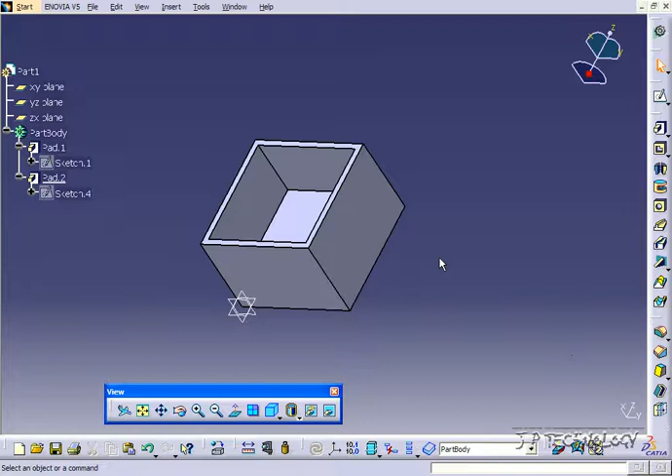Now, to use the Stiffener, all you need is one profile, or one line that's opened, and from that you're able to make a stiffener. So what we're going to be doing is creating a line along here and extruding it across. So to start off, let's click this face here and we'll click sketch.

Now when you're drawing these lines in here, there's two different ways to do it. You can go from line to line, touching the points there, or you can do it inside the box without touching any of the lines. So this is two different ways of making a stiffener. The first one we're going to make is just draw lines that are inside this box, not touching the edges.

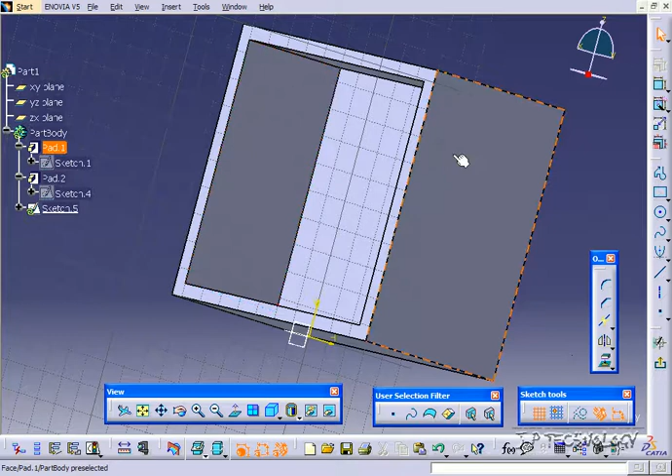So let's just rotate it around a bit and just draw a little line just like that in there. And if you look on the side, you can see that it's inside the box. Now go back up, click Stiffener, and we're going to be using the from side mode. You're going to be able to use the from top mode when you click on the points to points.

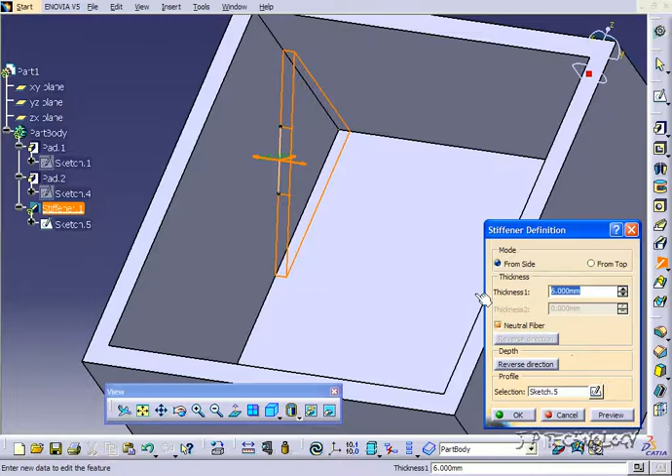So if we zoom in, what this is going to let us do is we're able to, with a thickness, slowly bring that sketch out. Now you'll notice that our sketch is only in here, but what this is going to do with the stiffener is it automatically extends it out to the edges and kind of cleans everything up for you. So let's bring this out 20, and we'll click OK. And the stiffener comes out 20 millimeters.

Now let's double click on the sketch. And let's just move this around. So let's drag this guy more over to here, and let's see what our result is. And you can see that now our stiffener has moved over also. Now let's delete this stiffener, and we're going to do it the other way that I was talking about.

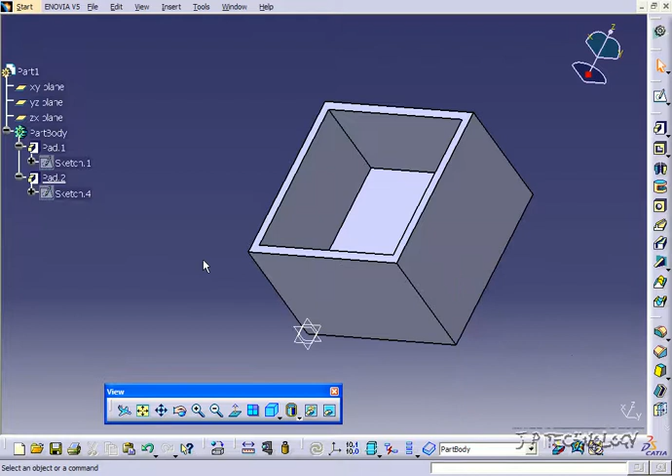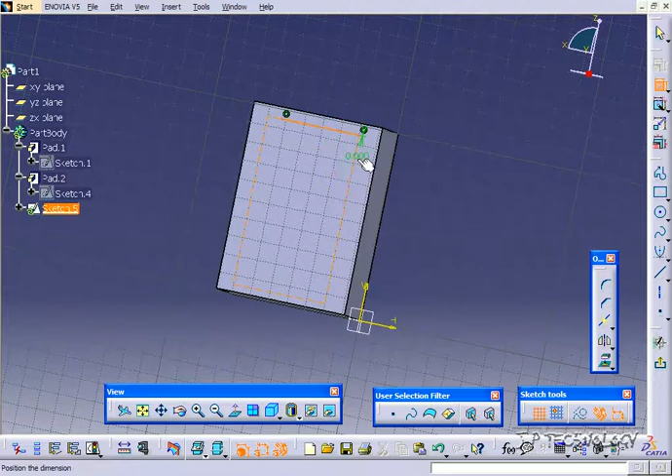So let's click this face, click sketch. Now click this face, and we'll project the edges, turn them into construction lines, and now we'll sketch from point to point. So we'll do one from this point along here to a point along there. Now let's put a little angle in there so we can play with it after. So we have an angle about 30 degrees. So let's put in 30.

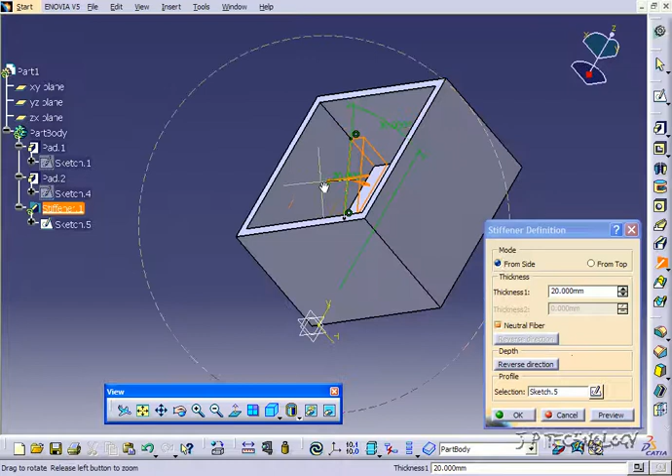And let's go back up. And let's click the stiffener. And from this one, you can use the from side or you can use from top. So right now on the from side, we're making exactly the same one that we had before. From top, we're going to make one that's going to have a hollow opening in it. So let's click OK.

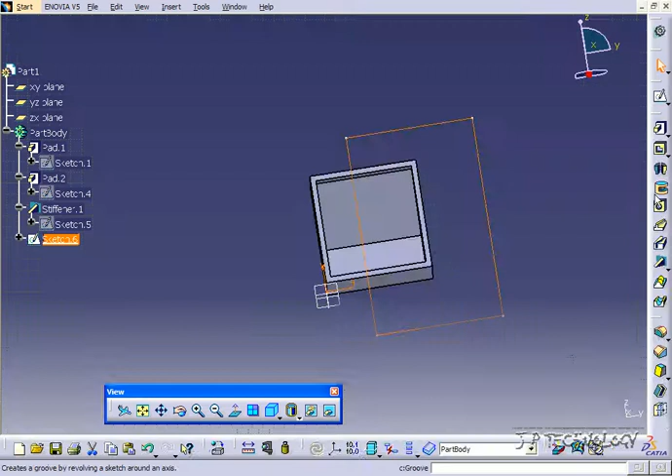And let's click on this surface here, and we'll sketch out quickly a rectangle and just cut this little bit out just so you can see the gap in there. So if you can see in the back there, you have a gap, and that's what using the from top compared to the side is there. And let's go back.

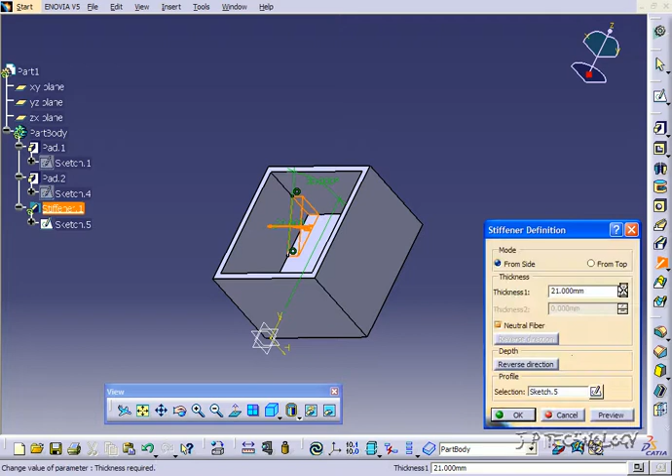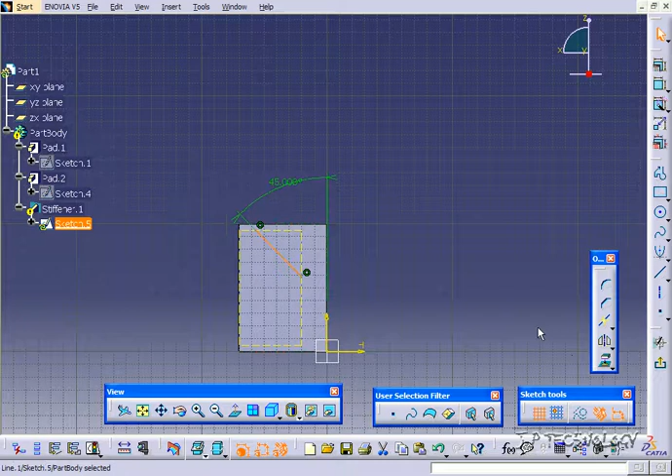Now let's make the stiffener again using this point to point, and we're going to use the from side. So this is just like the other one. We're just going to extend it out 21, click OK, and we'll edit the sketch, change the angle to about 60. And because it was outside, it's not going to work, so let's go back into it, put it to 45, and just bring it in. And it should work this time. And it does. So you're able to play around with the stiffener like that.

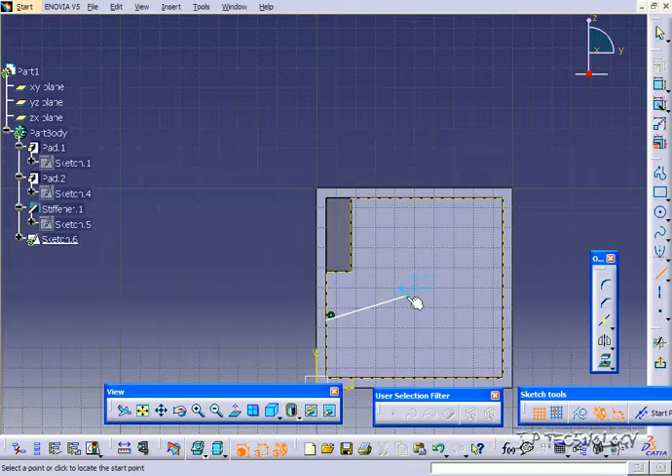Now let's do one that's on the top. So let's click this top surface here, click sketch. Now we'll click this face here, project it out, and turn it into construction lines, and let's just draw a little jagged line across. And we'll go back up, and we're going to create a stiffener from here. Now click OK and click from top.

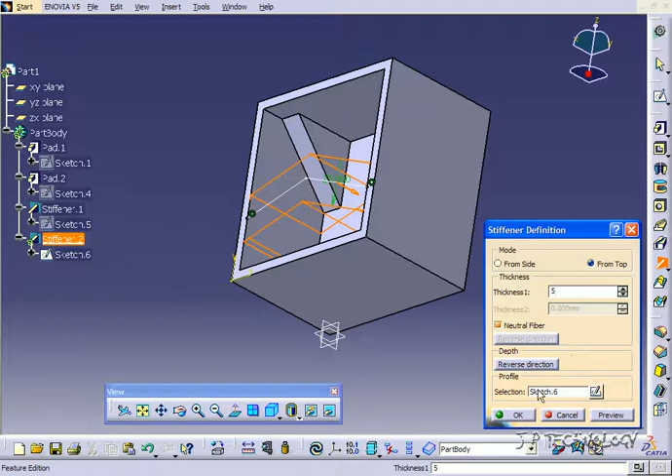So now we're able to create the stiffener from the top in this mode. So let's bring this down to about 5 millimeters for the thickness. Click OK. And now we've made a stiffener in here for about 5 mils. So what the stiffener does is we're allowed to just use one sketch line, and you're able to create kind of like a stiffener inside the part that adds like ribs and whatnot.

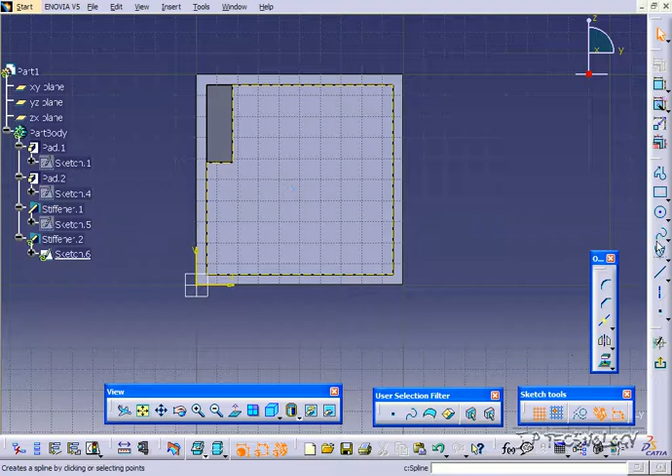Now we're going to make one more from here. So let's just double click on the sketch and let's delete these lines and let's just try to make an organic one. So we'll use the spline and just make one with a few curves. And we'll go back up and we've created a stiffener with those curves.

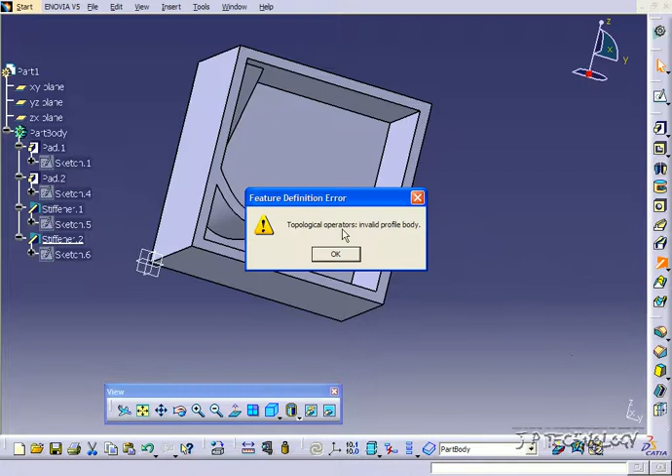So like I was saying, with those lines, all you need is one line that's open, not a closed profile, and then you have to toggle between the from side and from top to get the results that you want. So by doing this, you're able to create stiffeners inside parts quickly and easily just from a single line. And that concludes our tutorial on how to use the stiffener feature within CATIA v5.